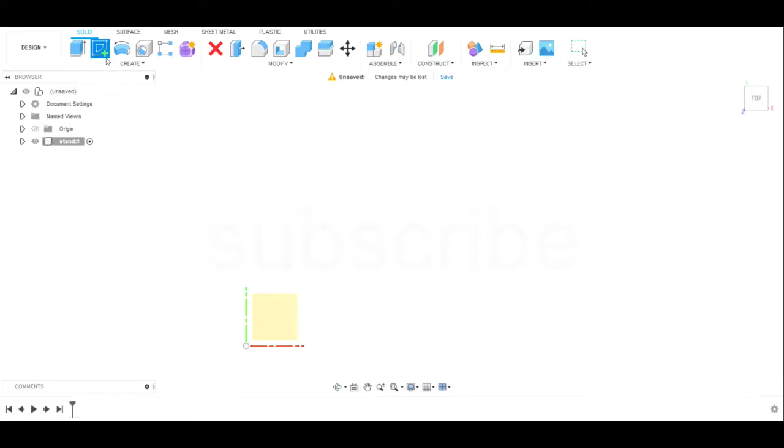So we're going to start with the drawing, and we know that it's 2 inch by 36 inch the stand that we want. So we're going to draw 36 inches, tab 2 inches.

And because we need to cut on 2 sides of this, the slot's going to be on 2 sides of the tubing and the holes are going to be on 1 side, and we cut in 2-dimensional profiles. We're just going to flatten this tube out and make 2 different sides.

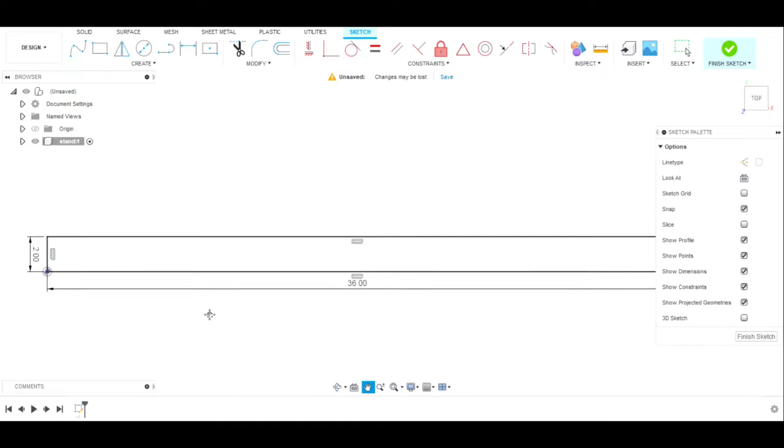That's it. So we'll grab this rectangle here, we'll come straight off of this point so we know we're exactly in line, and we'll make another one. 36, tab 2 inches. There we go.

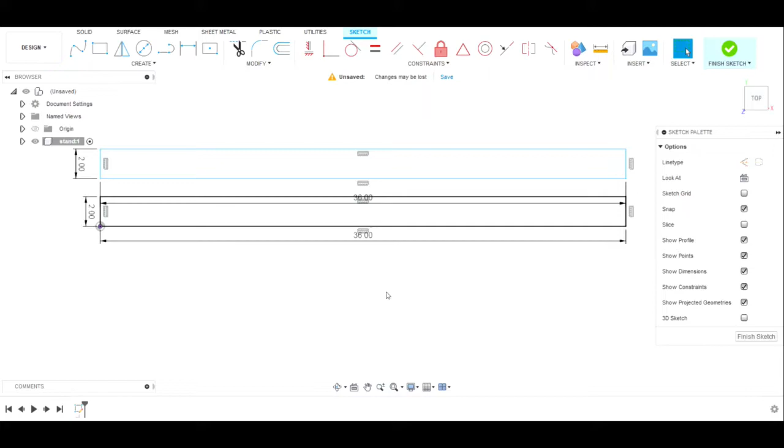So in this video, we're going to talk about construction lines and how we use them and how you can use them to help you with your Fusion. So the first thing that we want to do is grab the line, make it a construction line, which is over here in line type.

And then we're going to find the center, and we know it's center because it has that triangle right there. So that's center. Line type. There it is.

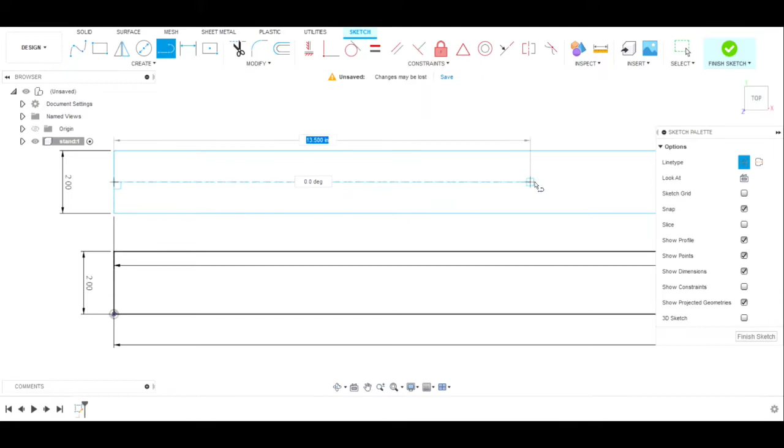We'll go all the way to the end, and we're just drawing a line right down the middle. Do this again to this one. We can tell it's a construction line because it's dotted, it's not solid. Alright, so there we go. We have our 2 construction lines.

I'm going to right down the center. So we'll start with this one because it's a lot cleaner. So we need to make our slot. Our slot is going to be 0.7 inches down from the top.

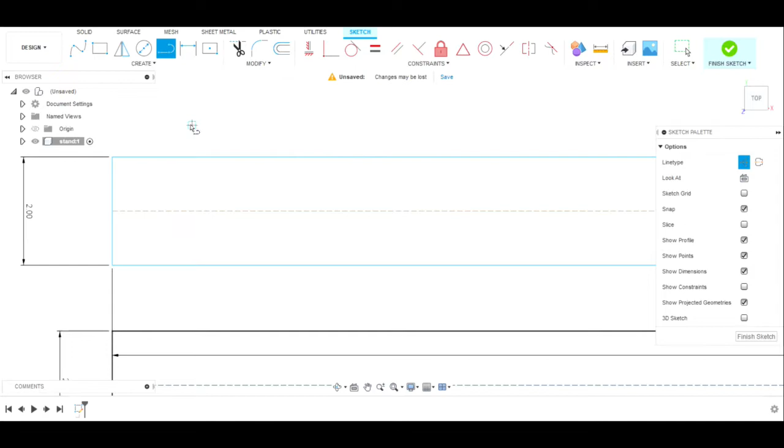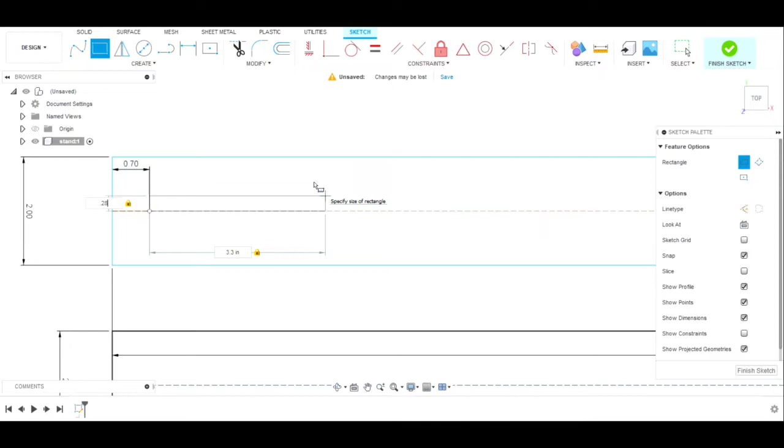So we can take our construction line, start there. If we come down 0.7, that's going to give us a point. Now that point is what we're going to use to make the top of the slot. So we don't want our slot to be construction, so we choose the standard line type, and we're going to make half of it. So this is going to be 3.3, and we know we want it to be 0.28 wide. So there's half of our slot.

Now to get the other half, we're just going to simply mirror it. So we hit this, this is the mirror button. We grab the lines that we want to mirror. We don't want to mirror the center one. The mirror line is going to be that center construction line that we already made, and boom, there's our slot. We'll just get rid of this center part, and there we go.

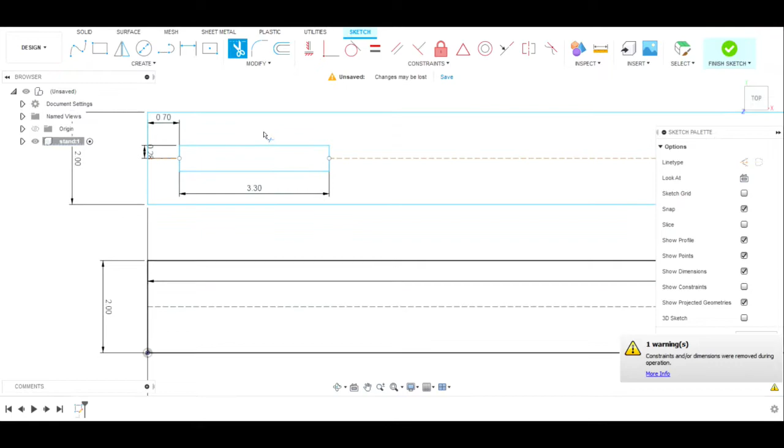Now to make the holes, so if you can imagine those bolts, they'll come down from this side. The bead roller will sit down into the slot. We're going to cut this part off the top, and I'll explain why we left this here, just to cut it off. But the bead roller will sit down in here, and then the bolts will come down from this side and thread it into the bead roller, because it already has holes with threads in it.

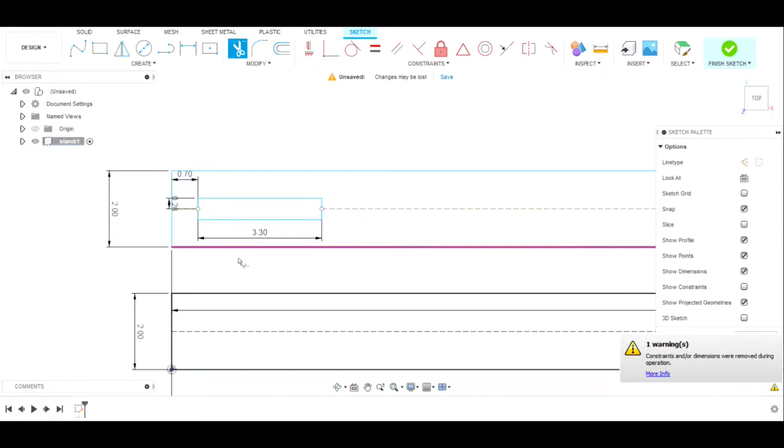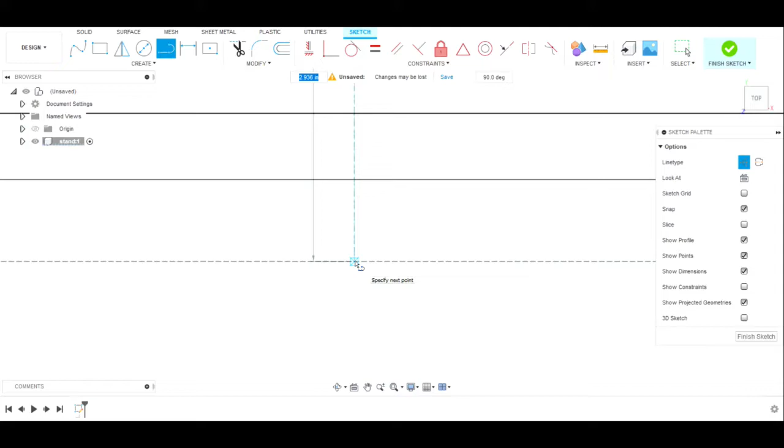So it's important that we line this whole thing up so these holes will fit the bead roller. So to do that, we make our construction line again. We grab this corner here, and we come down. We want to grab it right at the center, that center line. And we want to make sure we're 90 degrees, and we are. And then we'll do the same thing on this edge.

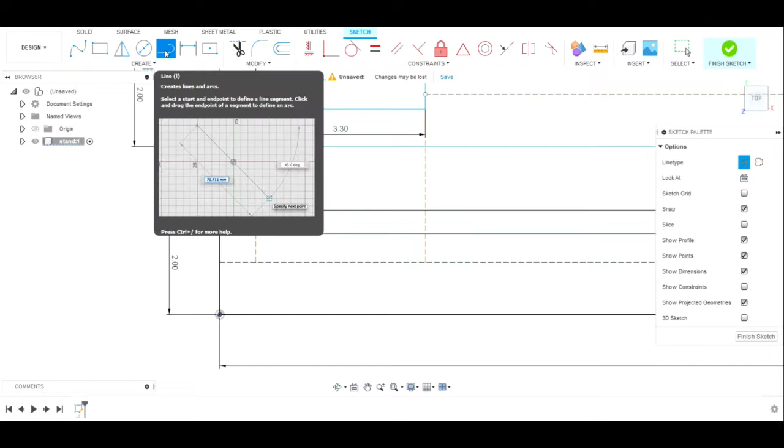And there we go. There's the 2 top sections of our slot. Now with our construction line, once again, we can grab here, and we're going to make a point, and this is where the first hole is going to be. So the first hole is going to come up, and we know because we measured it, we want it to be 0.563 of an inch off the bottom.

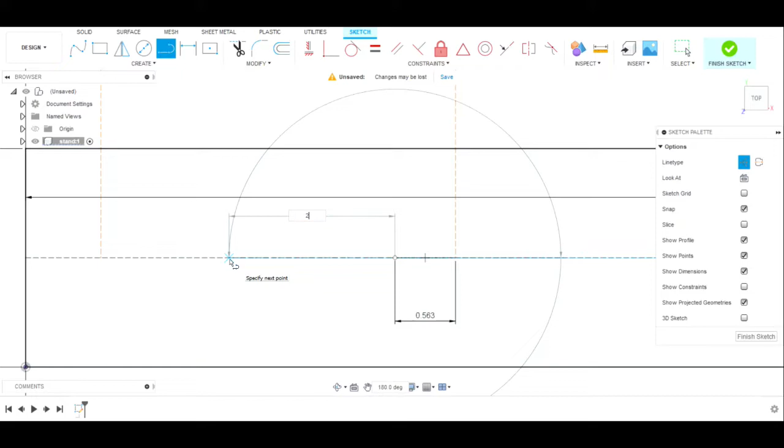Now we know that our holes are 2 inches apart, so we're going to do that line type again. We're going to grab this point, and we're going to come up 2 inches, and in those 2 points, that's where our holes are going to be.

So now we'll draw our holes. We'll create the circle, center diameter circle. We'll make sure that we have the standard line type. We'll grab this point. We want our holes to be 0.55.

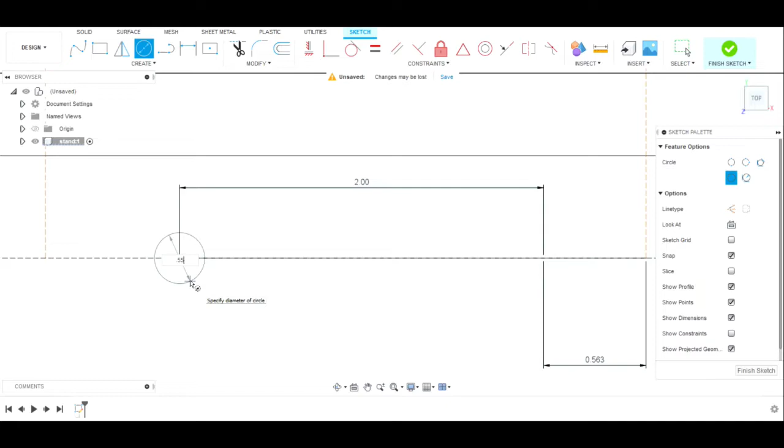Then we'll just grab this. That's our second point, 0.55. Now there's our two holes. There's our two corresponding holes to this slot.

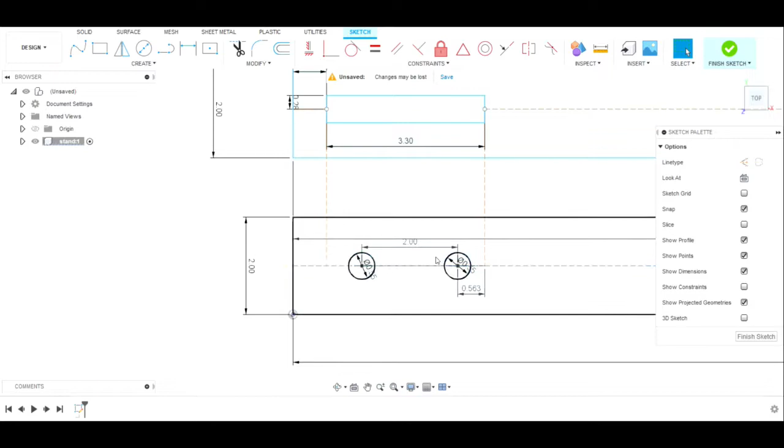Now all of this was pre-measured because our bead roller has, again, holes drilled into it and already threaded and tapped. So these corresponding holes need to line up with this corresponding slot. So when we slide the bead roller down in there, these holes will line up perfectly and we could bolt it all together. So back to why I left this space here, 0.7 of an inch.

And this could be any dimension really. The reason why is because we're going to cut this out on the plasma table.

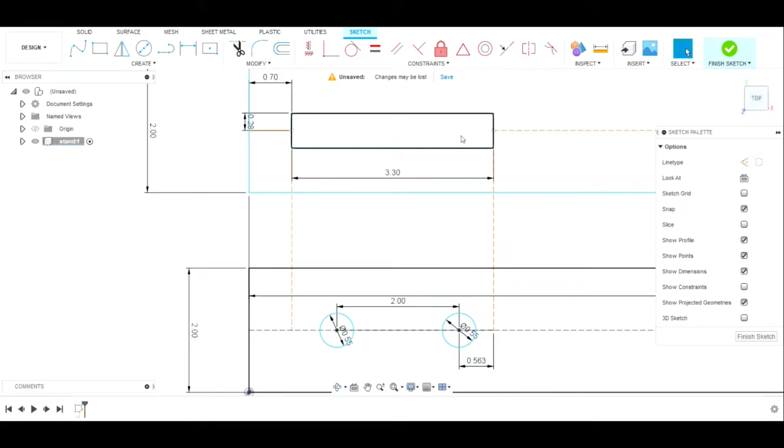The plasma table, although it can do an edge start, doesn't like starting at an edge and creating this whole tool path and cutting it off. It likes to make circles, if you will. It likes to make loops. So we just created a loop, and once it's cut, we'll simply put this on the chop saw and cut this part off, and now we have an open-ended slot. We know this slot will correspond perfectly with these holes, and we'll be able to bolt the whole thing up together.

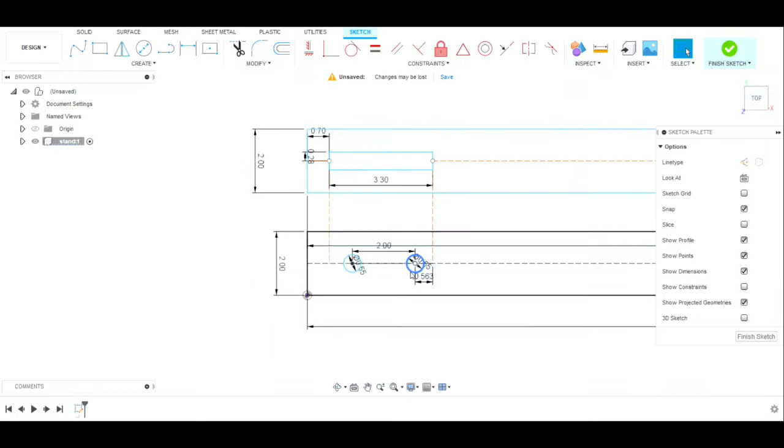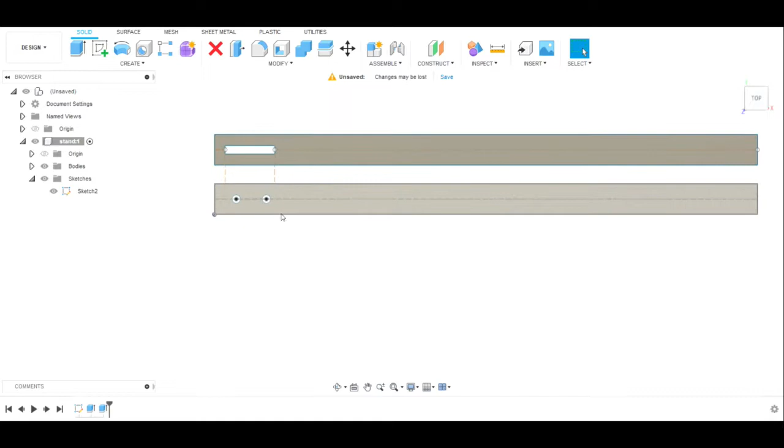So it's that simple. Now we just finish the sketch. We can extrude all this, 0.120. Whoops, so that's easy, that happens. We just come over here, turn on our sketch again. We extrude this one, 0.120, and there we go. Now we can turn our sketches off. There's our two sides of our tubing.

We're going to cut this side twice and this side once. I don't need to make another one of these to cut it, because as you'll see in the video, we set up a stop and a gauge and zero out the machine to this corner, and then the machine comes over and cuts the slot out. We simply rotate this piece of tube, rotate it twice to get to the other side, zero out the machine again, and it cuts this out. Then we'll zero out the machine in the same exact spot to cut out these two holes for the bolts. And that's it. It's that simple.

Here you can see we have the stop set up and a line drawn on there, so we know when we turn this thing or whenever we set it up, it's going to go right back to zero where we want it to. The machine just simply cuts that slot out. We move it off to the side, and now we rotate it twice. We'll set it back up, right back on that stop, right back on our marks, re-zero the machine, and cut out the other side, and it'll be perfect.

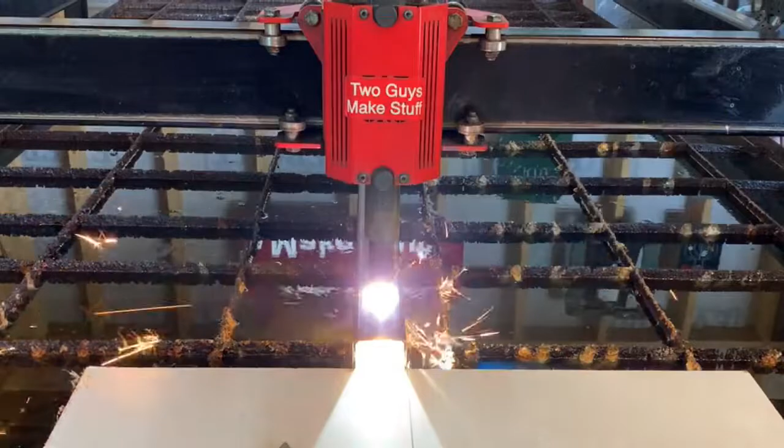Now we're just simply cutting off that end, so we have the open slot in our tube.

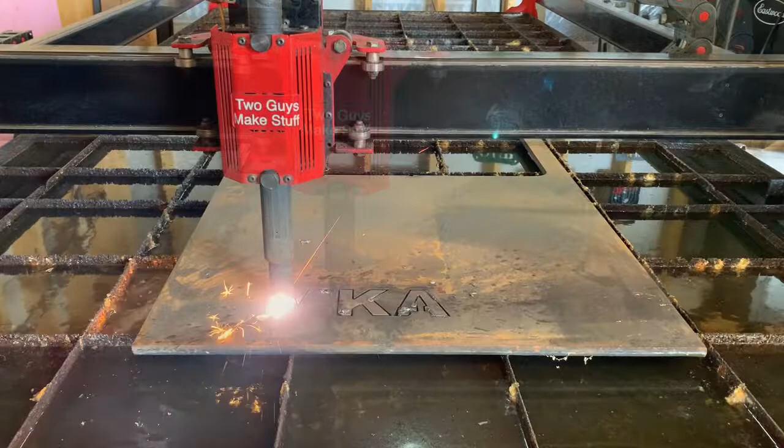So here we are cutting the base for this stand. This is a piece of 1/2-inch plate that we had. What we're doing is a little bit of gouging and some cutting, all in this same process. For the gouging, we make sure we have an old set of consumables in, because the way we do gouging isn't a preferred method by Hypertherm, but it works for us. So we set up with an old set of consumables, and then we set up the cut so it cuts faster, and we use a little bit lower of an amperage. What that does is it just cuts the top, and it doesn't cut all the way through the 1/2-inch.

Now we just did that for the letters for MKA. For the rest of it, for that piece in the center where the tubing is going to fit down into, and then of course the whole outside, we cut it at the standard 1/2-inch settings.

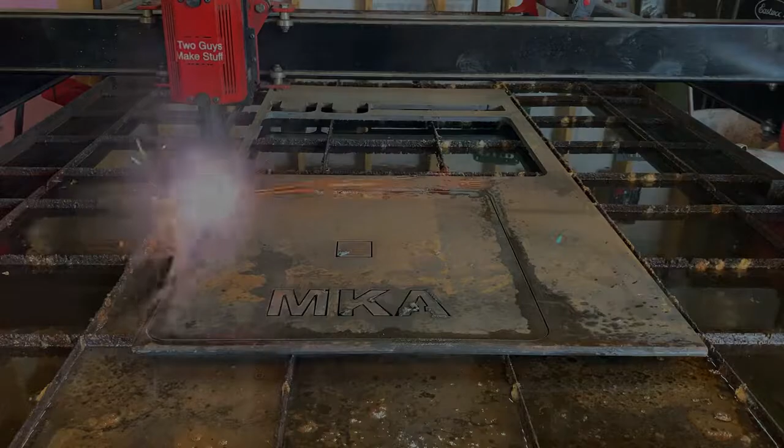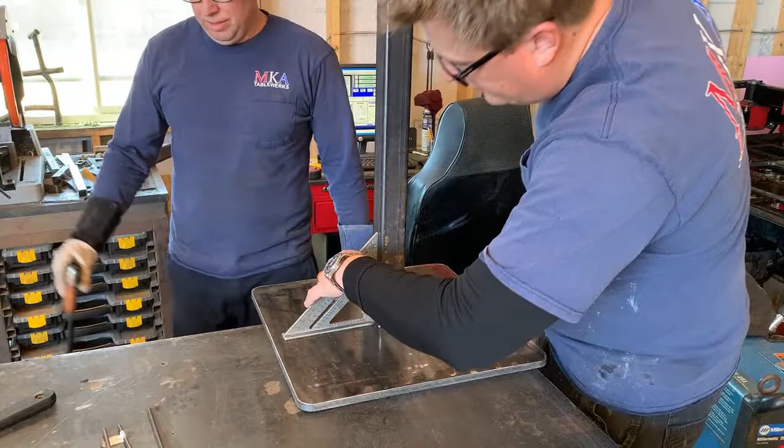Now here we're just simply welding this piece of tubing in onto that 1/2-inch plate, and we cut that 2-inch piece out of the center. One, it makes it really easy to center up this stand, and two, it gives it a really nice place to weld on the top and on the bottom, which makes it really strong.

Here we are welding the bottom of the tube to that 1/2 inch, and what we did is use a spacer underneath there, so when that 1/2 inch plate is sitting flat on the bench and we sit that tube down, it doesn't sit all the way down to the bench, which leaves a little bit of a gap. And now that's the gap or space we're using to weld a bead from that tube to that 1/2 inch plate, so it's able to sit on the ground nice and level because that bead is inside of there.

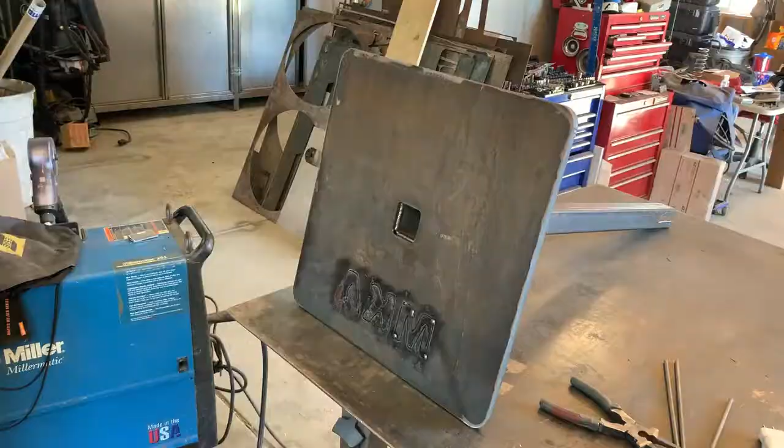Now the moment of truth to see if all of our measurements worked out. We set that thing down in the slot. You can see how it sits in the slot, and then it bolts from the front right into the machine. And because we did all of our measurements correctly, it fit in there just right.

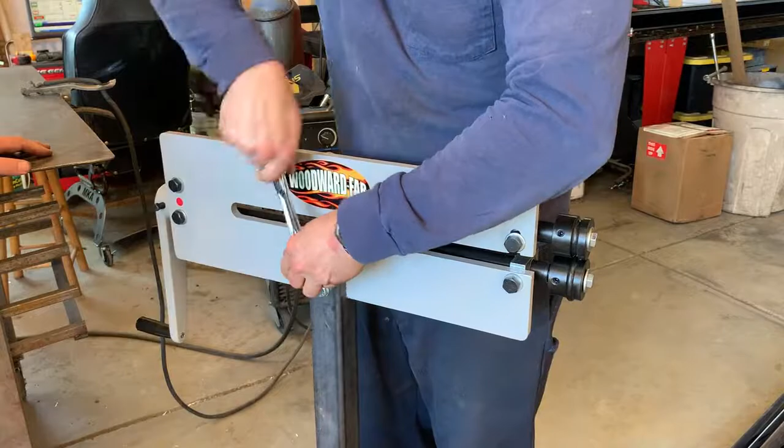We had some 1/4 inch solid rod sitting around, so we cut it down to some lengths, and we're just welding it to the side of this tube in here, and this is where we're going to keep our dies. Something real simple.

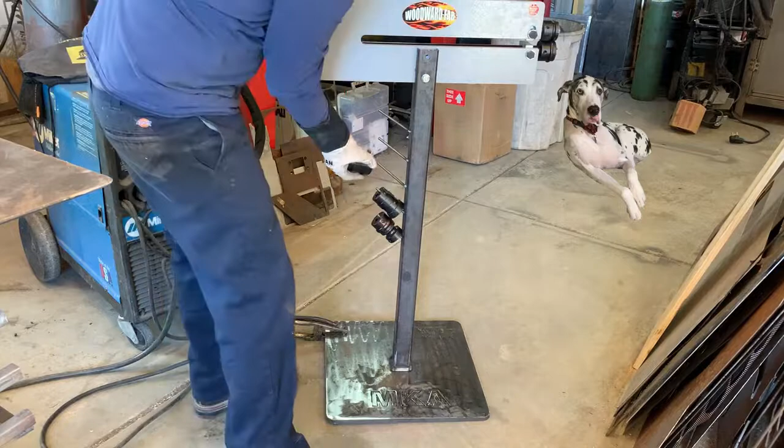Now that the fabrication's done, at least this part of it, we take it all apart and get ready to paint the stand.

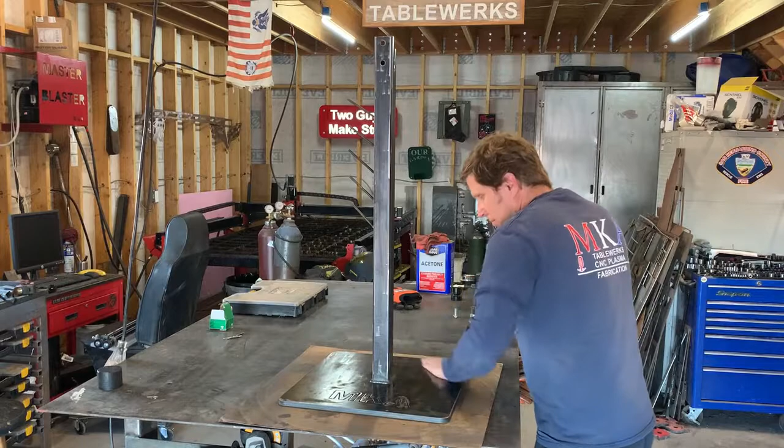After the thing's been sanded down and wiped down with some acetone, we're just going to simply hit it with some semi-gloss black. We've got some more fabrication that we want to do to this bead roller. This is just going to get it going so we can start using it in the shop. And once we start using it, we have some more things that we want to do to it, like I said. So a simple semi-gloss black on here will be easy to strip off and grind off if we need to do some more welding.